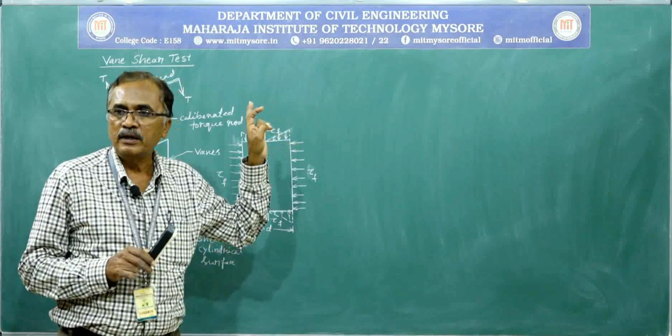The shear strength tests we mentioned are: direct shear test, triaxial compression test, unconfined compression test, and lastly the Vane shear test. We use these shear tests in the order of preference.

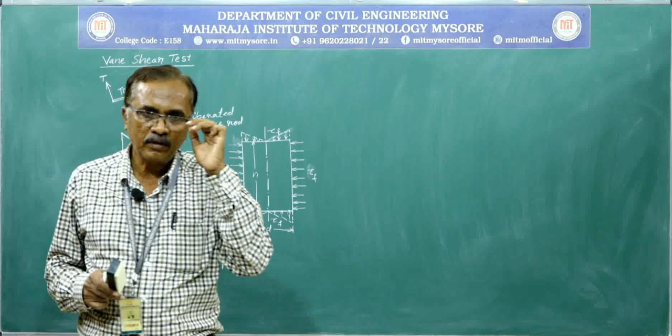If we prefer to conduct the test very quickly, we go for direct shear test, and it is most suitable for clay and sandy soil. Triaxial is a versatile test, and whenever we require accuracy, we go for triaxial compression test.

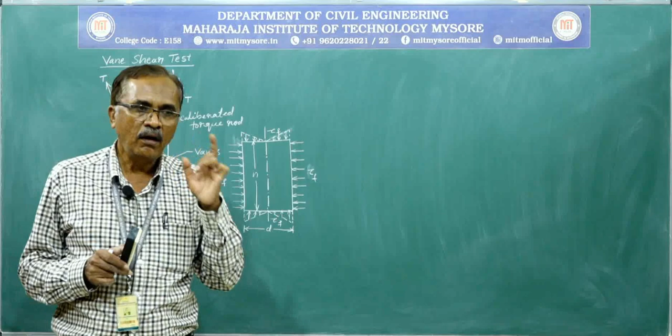For a saturated clay soil sample, we go for unconfined compression test. When it is not possible to perform triaxial compression test or unconfined compression test on soft clay soil,

sometimes we are not able to obtain a soil specimen, or suppose if we obtain the soil specimen, we cannot make the mold. So under such circumstances, as an alternative, we can conduct this Vane shear test on the soft clay soil placed

in the cylindrical mold in the laboratory. The same test can be performed in the laboratory or in the field, by using the vane. So this test consists of

a steel rod connected or welded by means of steel plates, 4 steel plates, and they are called the vanes. This is a calibrated torque rod over which we can record the applied torque, and this is the torque head.

So the vanes have a definite diameter and height, and you can see if it is pushed into the soil and turned, we can make this type of cylindrical failure surface.

To perform this test in the laboratory or in the field, first this vane has to be pushed into the soil and torque is applied through this torque head till the cylindrical soil specimen of diameter d and height h is sheared.

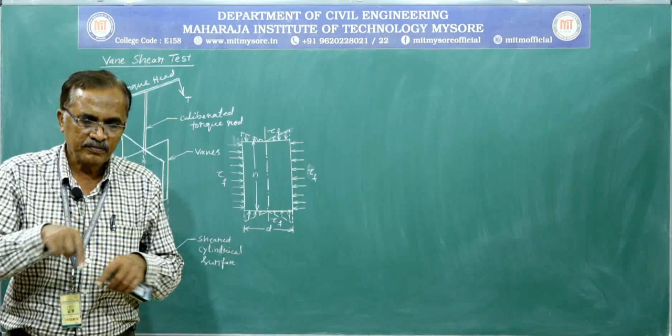Generally, when we shear the cylindrical soil surface, we completely immerse or push the vane into the soil completely. Then it has to be turned by applying torque, so that there is a failure surface of cylindrical shape.

Undrained shear strength can be obtained by knowing the torque applied.

The undrained shear strength is equated to the torque applied. The total torque applied is equal to the sum of the resistance offered, or sum of the moment due to the resistance offered by the surface,

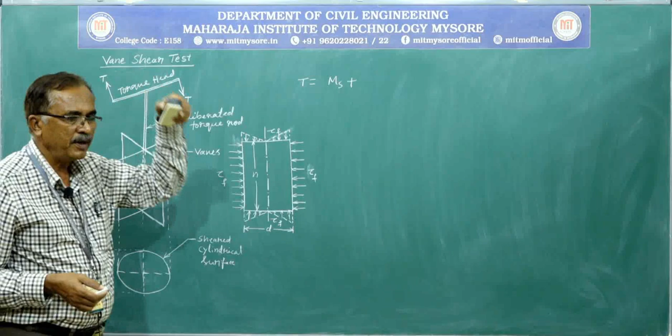plus sum of the resisting moment offered by the top and bottom ends, when the vane is completely pushed into the soil.

So it is 2 times the resisting moment offered by the top and bottom of the vane. Knowing the resistance offered by the surface and the top and end, we can equate it to T, and using that we can calculate the undrained shear strength.

So here the resistance offered by the surface, MS, is equal to 2 pi R into dr, pi into d into h into tau f—this is the surface—multiplied by d by 2 at the center. We can consider an arc situated at a distance r from the axis of rotation, and the thickness of the arc is dr,

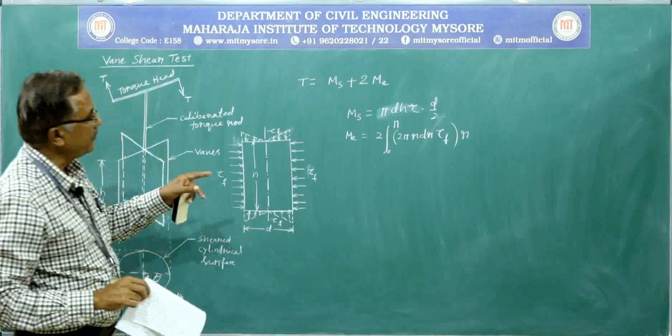and the resisting moment offered by the top and bottom end is equal to 2 into the integral from 0 to R of 2 pi r into dr into tau f, multiplied by r. So this resisting moment we obtain by considering the arc of a circle and the unit thickness dr, situated at a radial distance r from the axis of rotation.

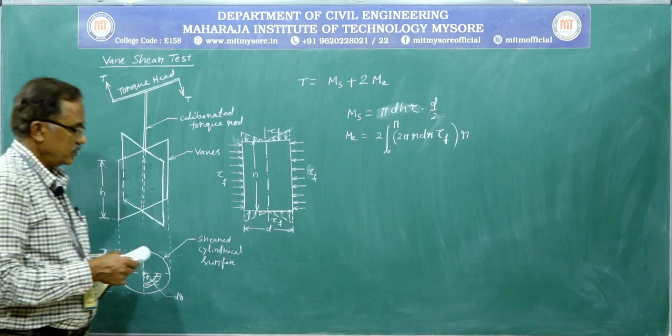Therefore, T is equal to pi times dh tau into d by 2, plus 2 times the integral from 0 to R of 2 pi r into dr into tau f into r.

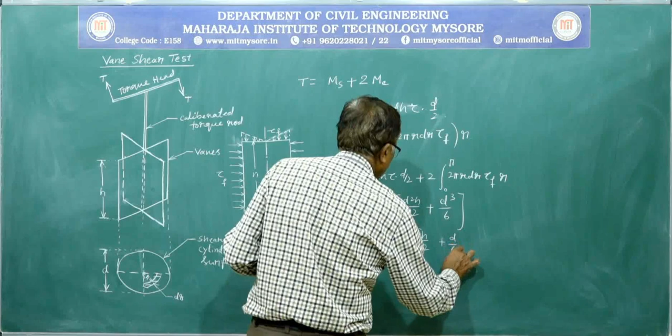So T is equal to... therefore tau f is equal to T divided by pi d square into h by 2 plus d by 6.

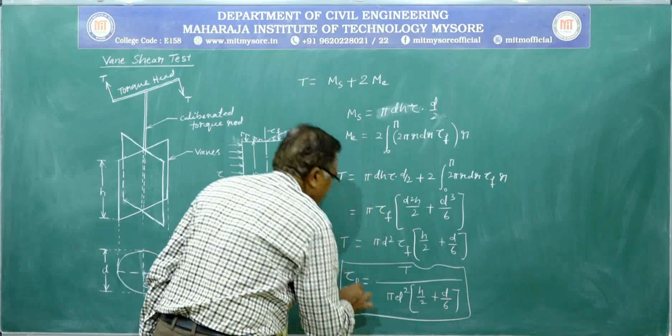So by using this equation, we can obtain the undrained shear strength, both in the laboratory as well as in the field. This is about the Vane shear test, used both in the laboratory and in the field.

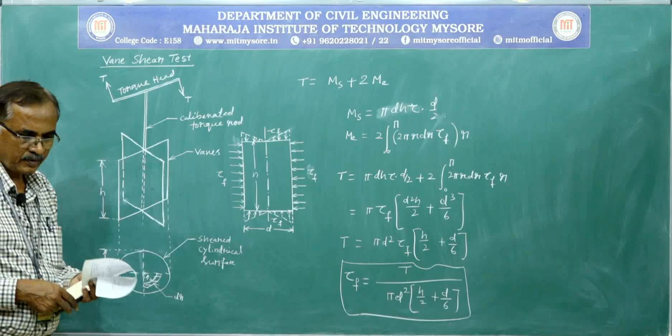Now let us consider a simple numerical problem on this.

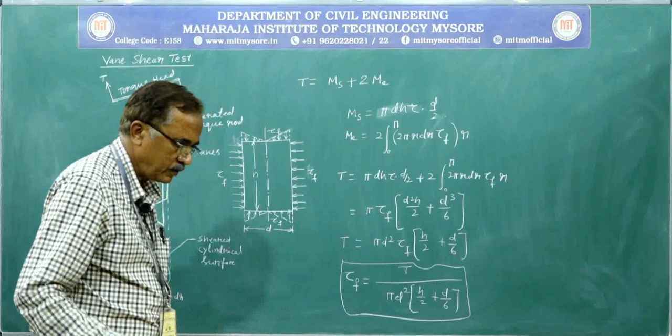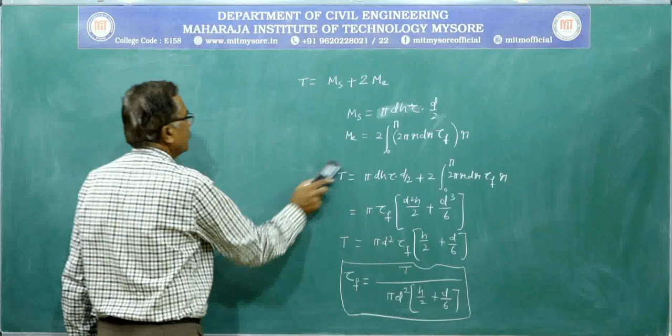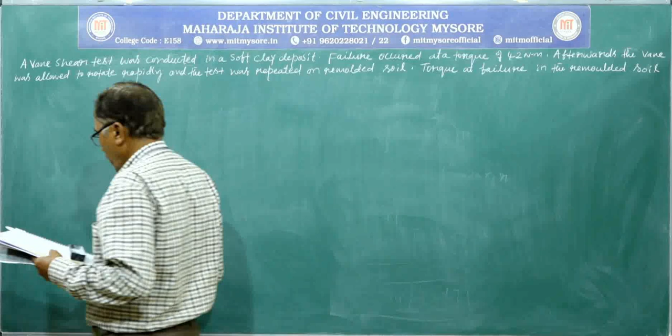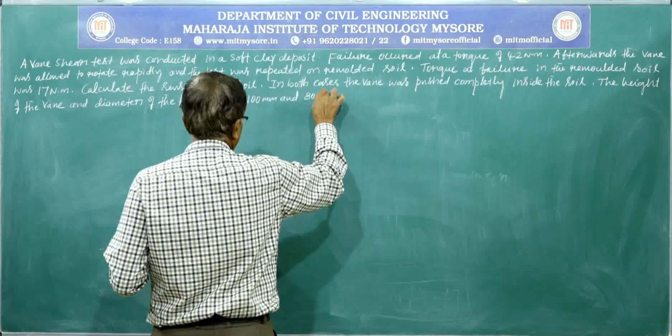A vane shear test was conducted in a soft clay deposit. Failure occurred at a torque of 42 Newton meter. Afterwards, the vane was allowed to rotate rapidly and the test was repeated on remolded soil. Torque at failure in the remolded soil was 17 Newton meter. For this, it is asked to calculate the sensitivity of soil. In both cases, the vane was pushed completely inside the soil. The height of the vane and diameter of the blades were 100 millimeter and 80 millimeter respectively.

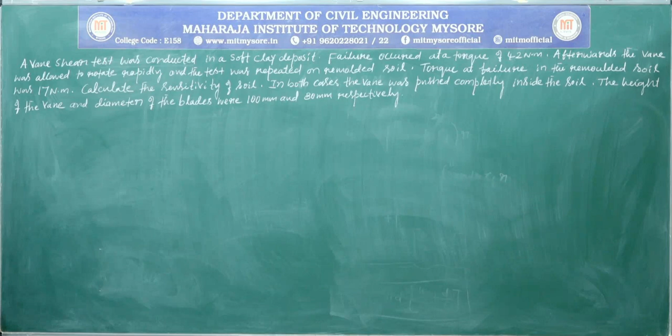So, a vane shear test was conducted in a soft clay deposit. Failure occurred at a torque of 42 Newton meter. Afterwards, the vane was allowed to rotate rapidly and the test was repeated on remolded soil. Torque at failure in the remolded soil was 17 Newton meter. For this, asked to calculate sensitivity of soil. In both the cases, the vane was pushed completely inside the soil. The height of the vane and diameter of the blades were 100 millimeter and 80 millimeter respectively.

So, when the vane was pushed into the soil, failure occurred at a torque of 42 Newton meter. Here there are two cases. The one is undisturbed case. Under undisturbed condition, when vane was pushed into the soil, the torque required to fail the soil specimen was 42 Newton meter, and if the vane was rotated freely, bringing it back to the failed surface to almost the normal condition, that condition is known as remolded condition. Again, if the vane is pushed and rotated to make the cylindrical surface, the torque required was 17 Newton meter. This is remolded condition. For this condition, asked to find out sensitivity of clay. The height and diameter of the vanes were 100 millimeter and 80 millimeter respectively.

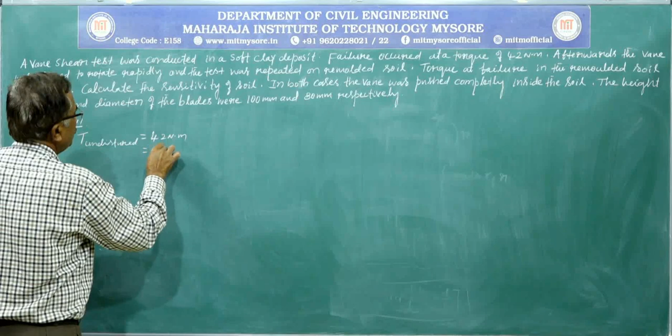So, given: the torque under undisturbed condition, T undisturbed, is equal to 42 Newton meter, that is equal to 42 into 10 power 3 Newton millimeter. Then T remolded, under remolded condition, torque required to fail this specimen was 17 Newton meter, that is equal to 17 into 10 power 3 Newton millimeter. The height of the vane is 100 millimeter, then the diameter of the vane is 80 millimeter. For this condition, asked to find the sensitivity. Sensitivity of clay is equal to question mark.

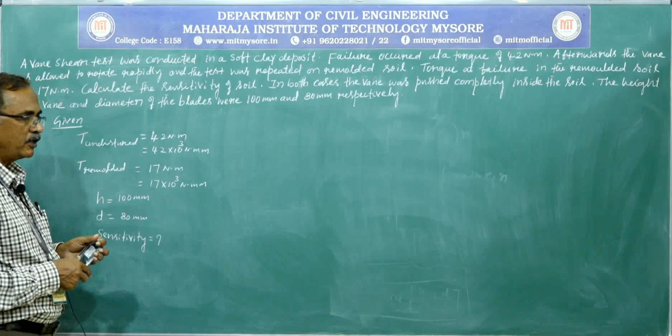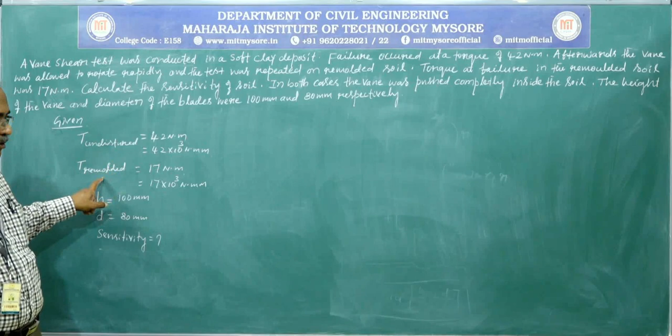So, here to find out the sensitivity of clay, we need to find out the undrained shear strength under undisturbed condition and undrained shear strength under remolded condition by using the torque obtained during undisturbed condition and remolded condition. Sensitivity of clay is equal to undrained shear strength under undisturbed condition divided by the undrained shear strength under remolded condition. So, sensitivity is the important parameter which we use to identify the behavior of the clay.

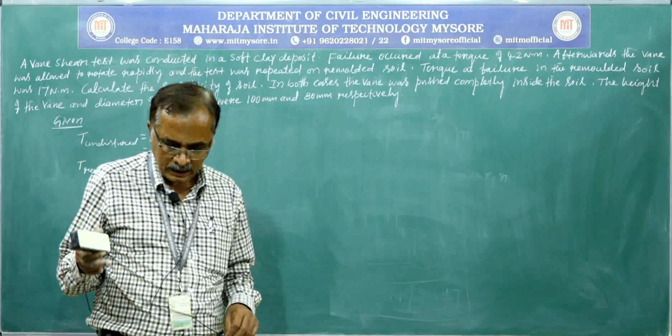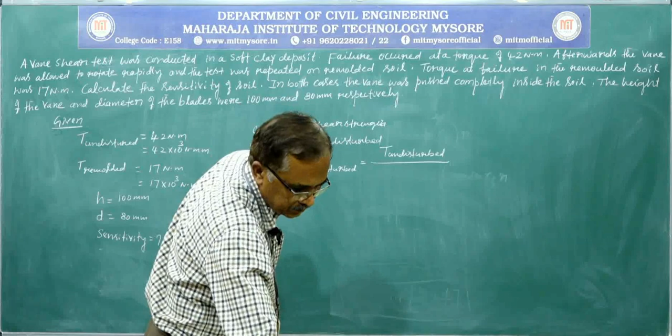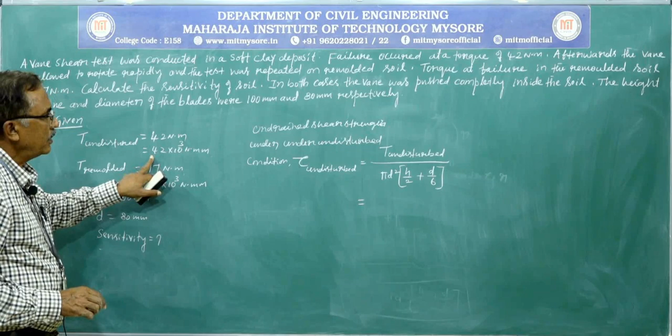So, we have the undrained shear strength under undisturbed condition, that is tau undisturbed, is equal to T undisturbed divided by pi d square into h by 2 plus d by 6. If you substitute the values, we know the diameter, we know h, we know T undisturbed condition, we can obtain the undrained shear strength under undisturbed condition, that is equal to 0.033 Newton per millimeter square.

Next, undrained shear strength under remolded condition, that is tau remolded, is equal to T remolded divided by pi d square into h by 2 plus d by 6. Substitute the values, you will get the undrained shear strength under remolded condition. It is 0.0133 Newton per millimeter square.

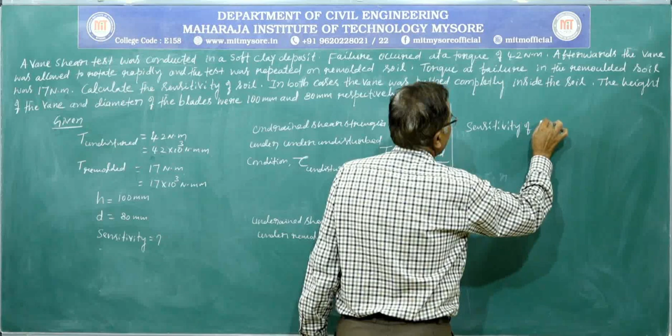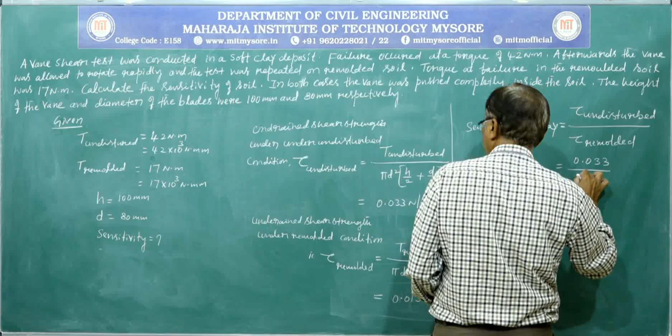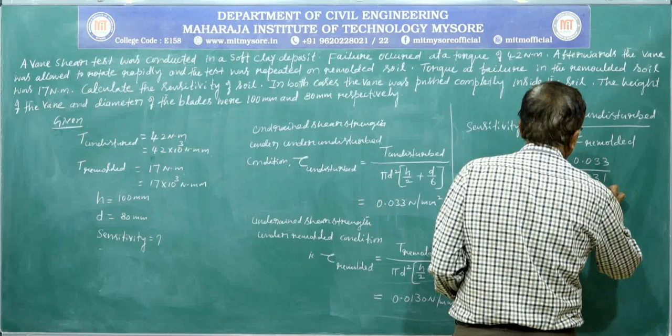Therefore, sensitivity of clay is equal to tau undisturbed divided by tau remolded. That is equal to 0.033 divided by 0.0133 is equal to 2.47. So sensitivity is equal to 2.47.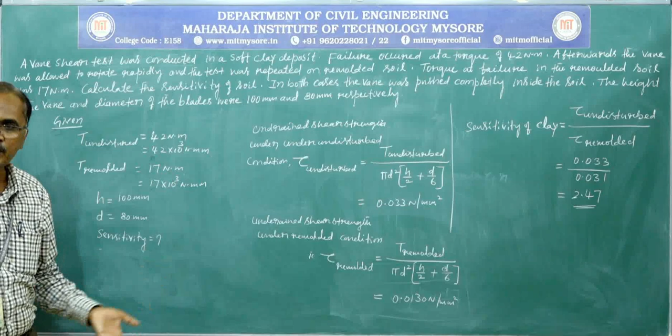So this can be asked like this, to calculate sensitivity. Even the same problem can be asked to obtain undrained shear strength under undisturbed condition and undrained shear strength under the remolded condition separately.